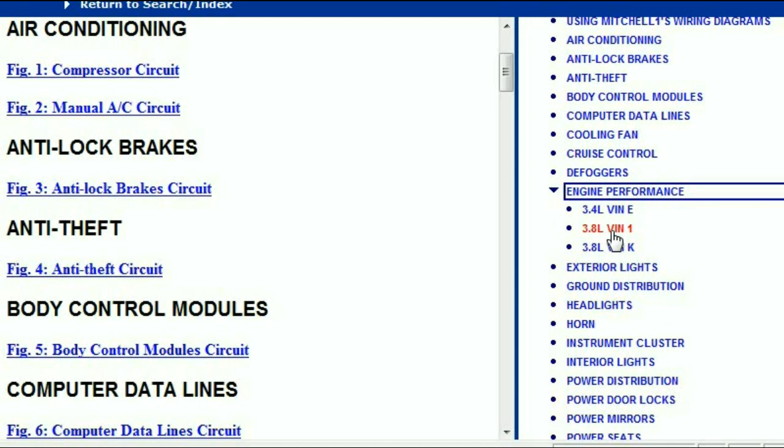The one that I'm opening right now is for the Impala 9th generation, produced in the year 2006. Under the engine you can see that there are three different engine variants: the 3.4 liter, the 3.8, and the 3.8 liter. I know one of these 3.8s is supercharged. I'm not so sure which one.

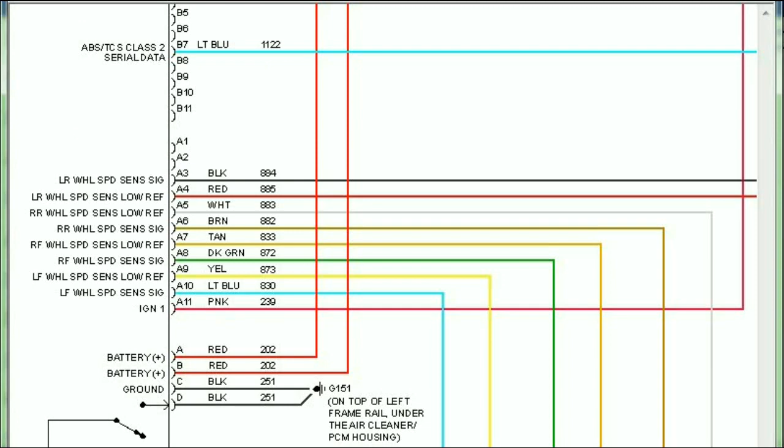Just to show you what a sample diagram is going to look like, I'm going to open the anti-lock brakes, and the moment I open the anti-lock brake circuit, you're going to see that the wires are represented in a color format. The colors that you're looking at right now are the exact colors that you're going to see within your vehicle. That becomes handy when you're trying to follow through and understand what wire represents what.

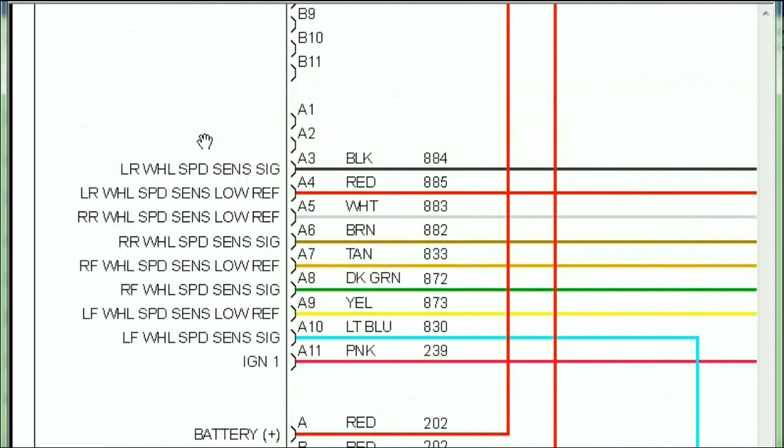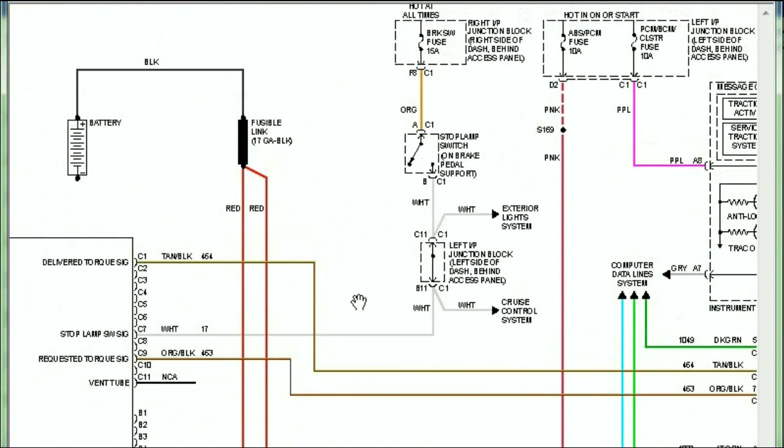In this case, I'm looking at the electronic brake control module, and I can see that there are about 22 pins. I'm being told where they're going, and I can see that they are connected to the left front wheel speed sensors. Those are the wheel speed sensors. I've got the traction control switch, and so forth. All the components connecting to the anti-lock brake system, you're going to get a diagram that explains that. But not just the anti-lock brake system.

You also have got your radios: radio with amplifier, radio with police option, radio without amplifier, and then the satellite radio circuit. Whichever one is in your vehicle, you can simply select and go through it. This car, I know, was used as a police vehicle, so that's why we've got the radio with police option.

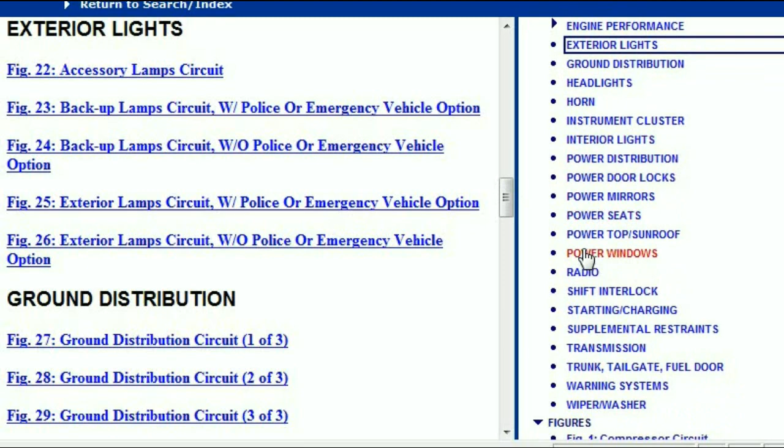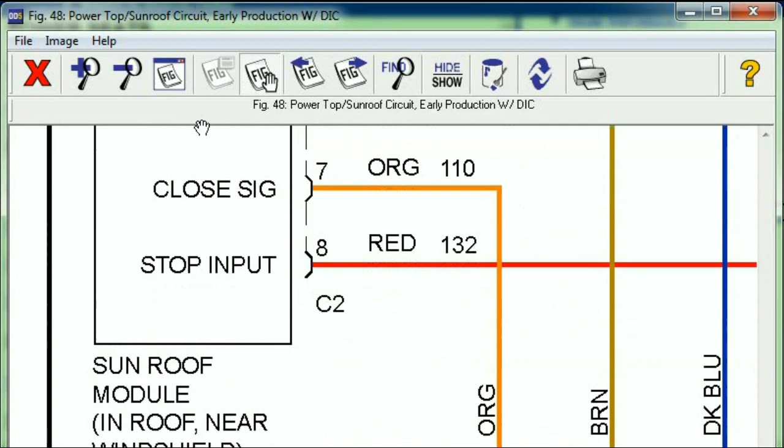Let me just check if there is... power seats. Really, any component that you want to refer to, you can easily select and open the electrical diagram. And as I said, you can zoom to any scale. You don't have to worry about the diagram pixelating, because it won't. The diagrams are high definition and sharp. So that's for the electrical diagram.

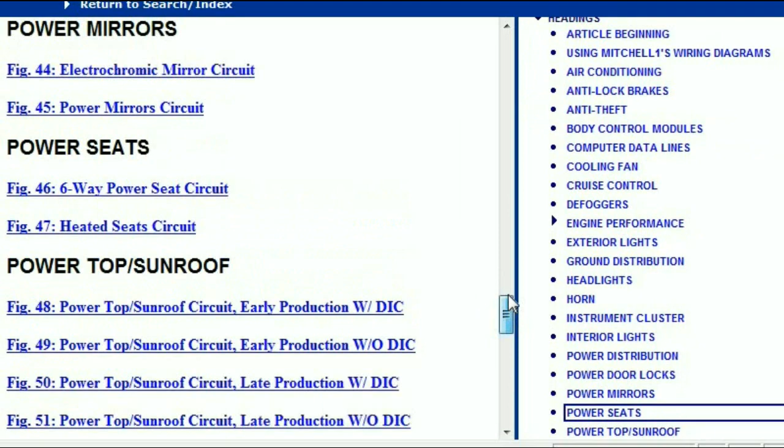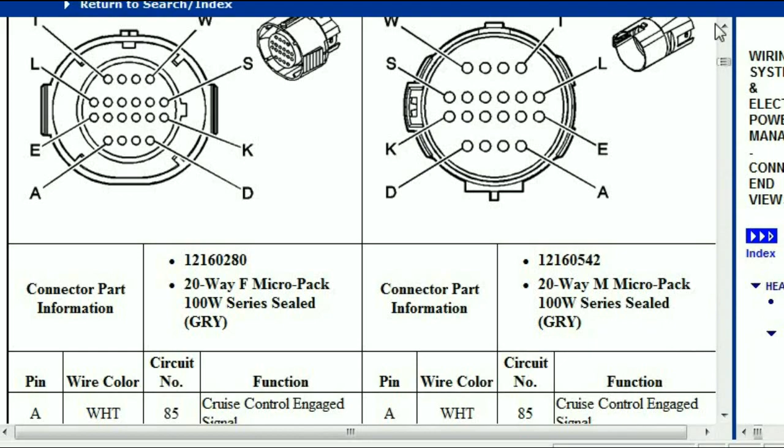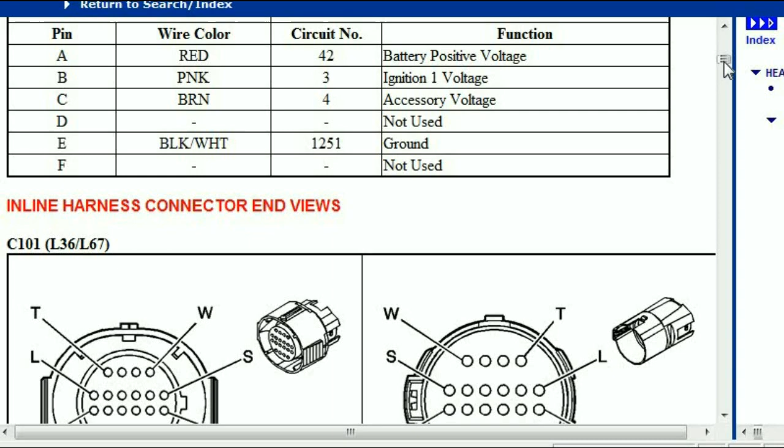Let me go to the section which has got the different wiring harnesses and wiring connectors, so you can also see just how comprehensive the information is. Here I've got a listing of all the harnesses and the end views. The one that I'm looking at is represented as C101. It should be inside the engine.

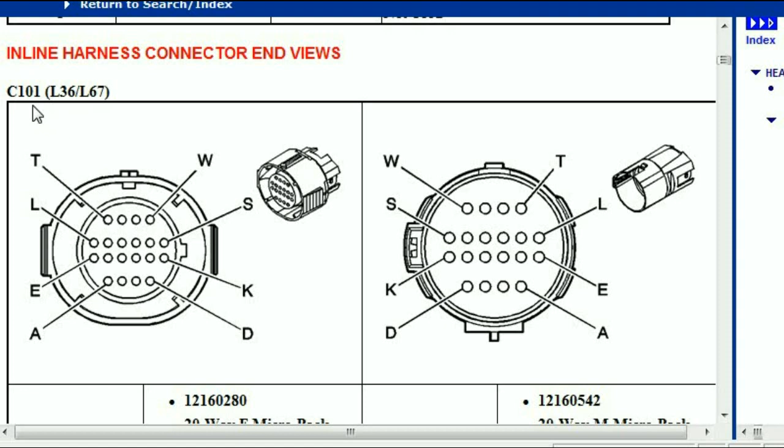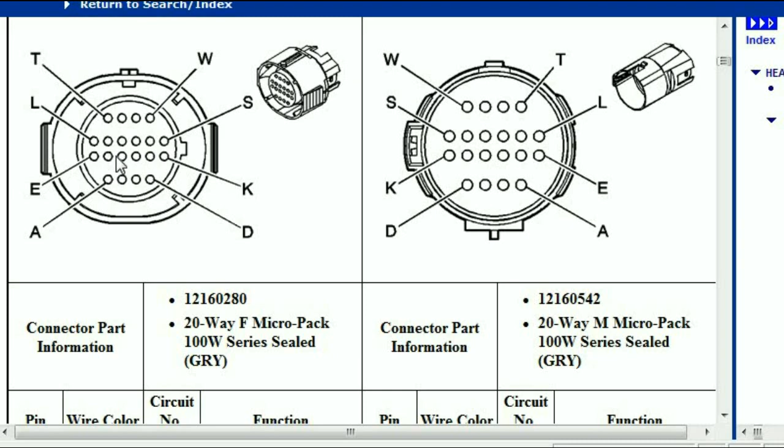In the circuit diagrams, you're going to see different harnesses highlighted by their number. For example, in this case, this one is C101. On the electrical diagram, you're going to be told that this connector is C101, so you can refer to this section, which will tell you what each pin is representing. Here we can see A to D, so this is A, B, C, D, E, and in between up to K, and so forth.

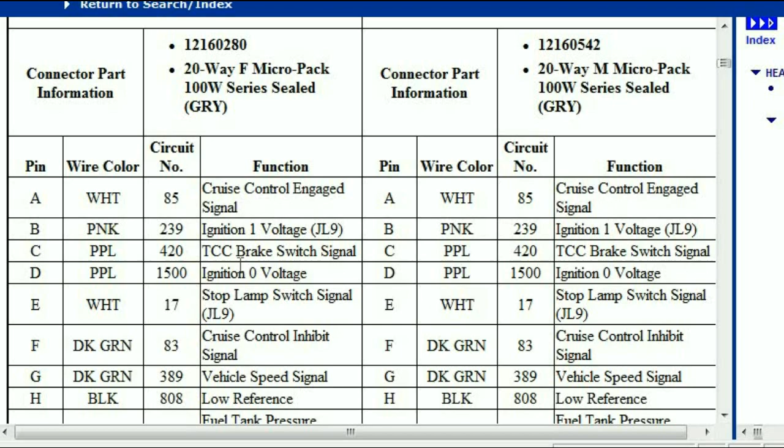In the information that follows, you can see the part number, in case you want to search for it online or buy it. It's called a 20-way F Micro-Pack 100W series sealed. The A pin is the cruise control engaged signal. B is the ignition 1 voltage, and so forth. So the wiring harnesses are fully explained.

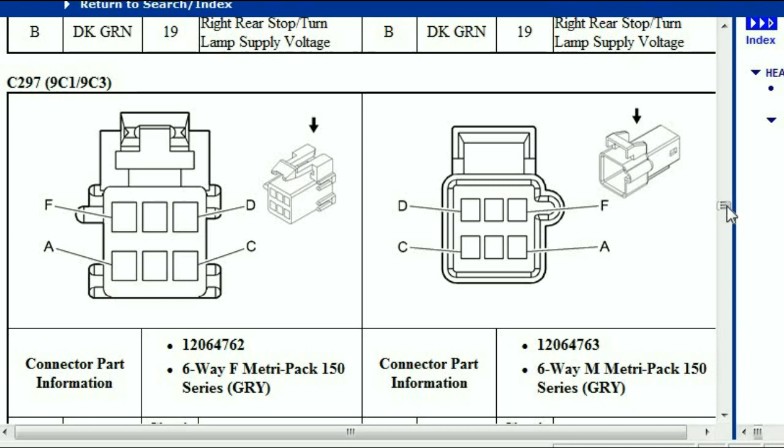As you can see, as I'm scrolling through, there are quite a lot of different wiring harnesses within this vehicle. So you've got comprehensive information explaining the wiring diagrams and the different wiring connectors or wiring harnesses.